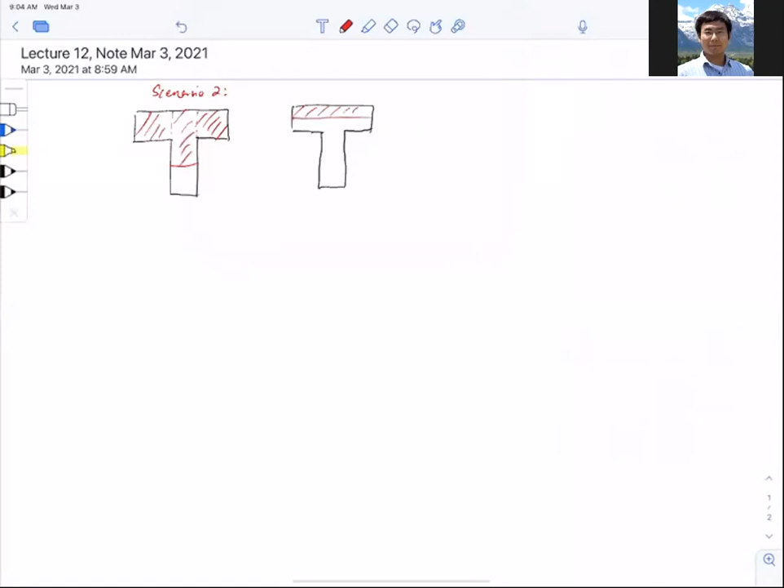All right, so for quiz 5, we already got a geometry, right? That is the T-beam geometry. And for the T-beam, we already talked about this. There are 2 scenarios. One is that we can treat it as the wing and the web, and this is called scenario 2. Now the other one, the reason I put it lighter is because I don't think you'll see this one, but even if you do, the compressive zone will be kept within the flange, and that's called scenario 1.

So if you look at quiz 5 particularly, it gave you the reinforcement area, which we calculated to be around 20 inches squared. And that's quite a bit. So I said in the quiz that you don't have to worry about how to fit the bars in for now. You can simply assume you just have a lump of steel right here, As, and let it be 20 inches squared. All right.

So that's what you do. You put a lump of steel there, and you can assume the height, right, by doing h equal to ds plus, now either you can do 3.5 or 2.5. At this point, it doesn't really matter to me, but I prefer you do 3.5, okay, because you have a lot of bars there, but that's okay still.

Once you get the depth, the first thing you do is to figure out which scenario. Now, we cut this number because we assume scenario 1. All right, so let's go with scenario 2 first. So if we go to scenario 2, the first thing is to separate the reinforcement. Okay, so we're back to how to calculate the moment capacity for T-beam, basically, right?

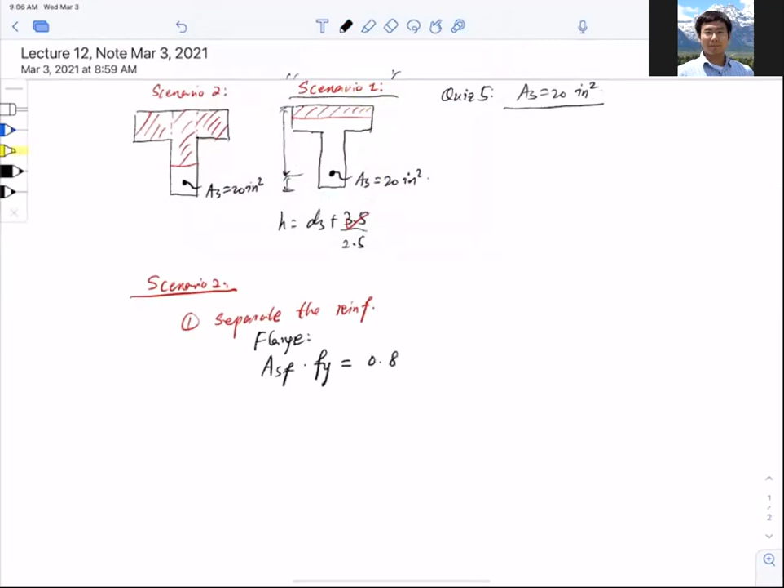So what you do is that we said assume it's scenario 2, right? So you have ASF, that is the reinforcement corresponding to the flange, and that times Fy, and you let it equal to the compressive part, which is 0.85 f prime c, and now the width is BF minus BW, to get you the wing or the flange width, okay, and then multiply by the flange height, which is HF. In this case, let's say HF because I already use H as my total height.

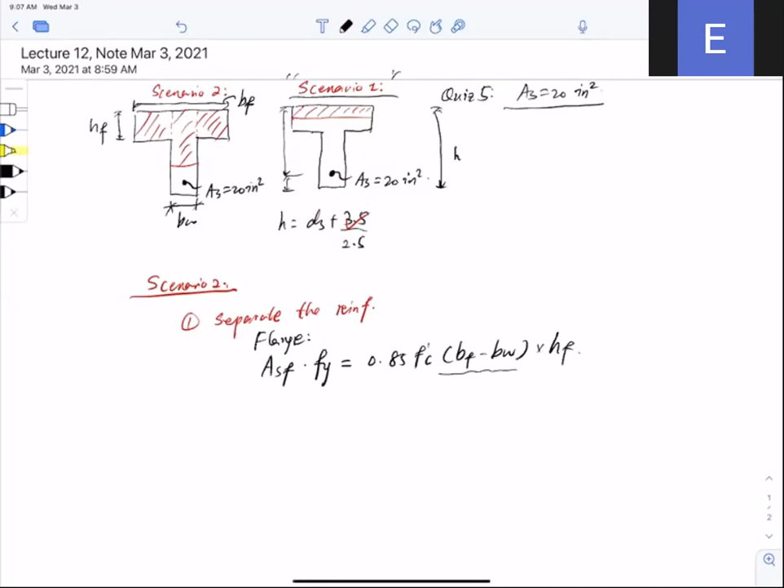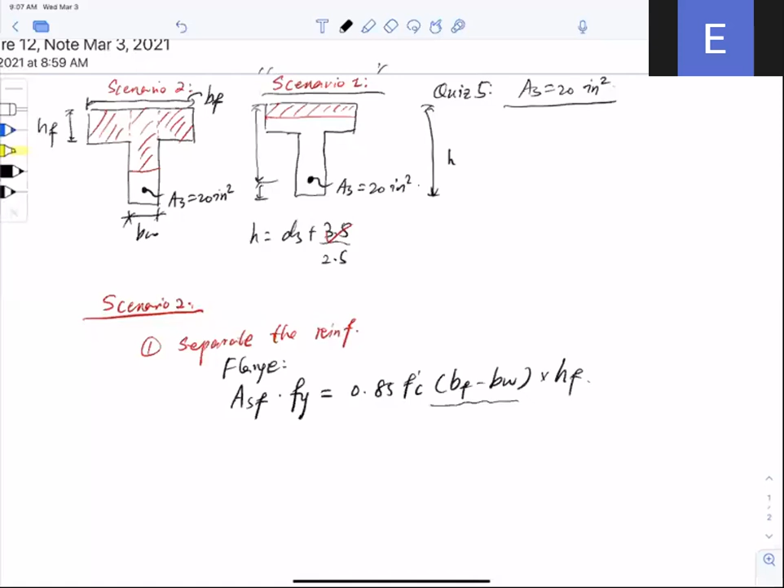Hey, Professor. Yes, ma'am. For your scenario 2 on the right-hand side, is that supposed to be scenario 1? Yeah, this is scenario 1, right? So that's like the compressive zone is within the flange. Okay. To me, it just looked like a 2. Oh, so sorry about that. How about that? Okay, yeah, that's scenario 1. 2 is on the left.

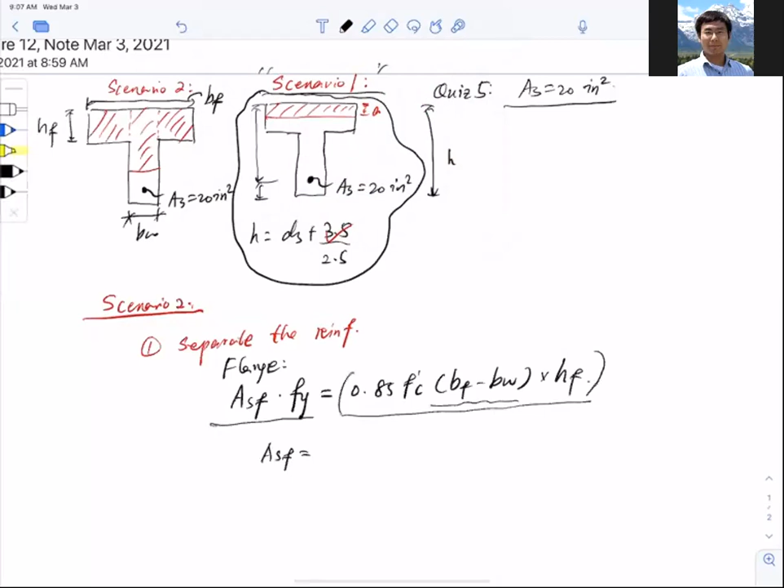All right, so let's get back to this. So this is how we define the reinforcement for flange, right? So we can immediately calculate the flange. So it's basically this bunch. I'm just gonna save time here because I have other things to talk about today, but this is how we determine the reinforcement for the flange, right?

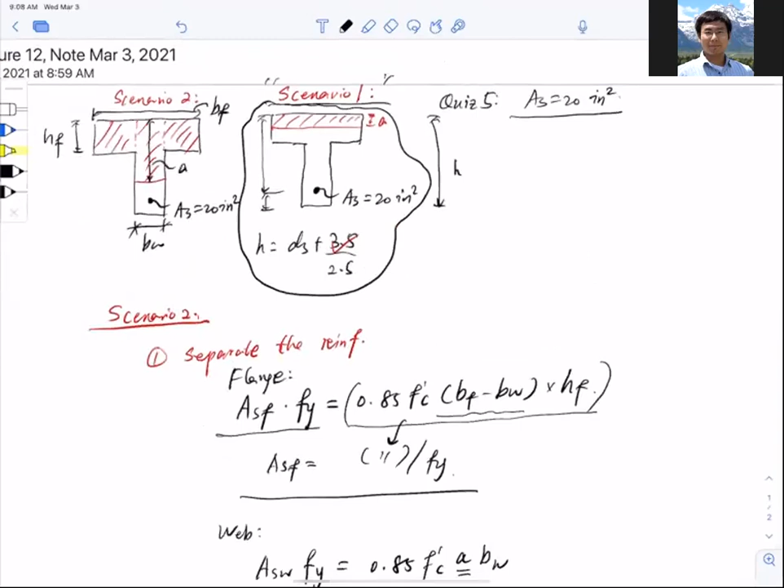Now, separately, we can define the web reinforcement. So this is ASW, and then you write the equation, and this is 0.85 f prime c. And now be careful, this is A times BW. And where is A? A is right here. Okay, so now with this, you could get ASW. But be careful, there's a problem. What is the problem? That is, you don't know A. But you do know ASW in this case.

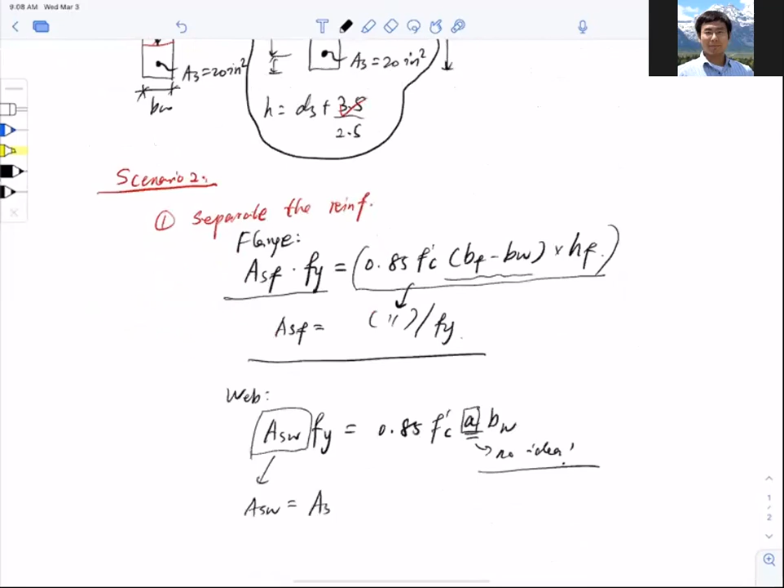What is ASW? That equals the provided steel AS minus the ASF. Okay, so in the web, now the story changes because now we can compute A, which is ASW Fy divided by 0.85 f prime c BW. So now you can think of it as more like a rectangular section, but the only difference is that this is called BW and this is ASW, right? And now you're getting the compressive zone A here, and essentially you can just compute the moment.

So now I have this flange and I have this. So I calculate the moment capacity separately, all right? So I can carry on like this, or I can probably shift this down here. So finish the top part first. For you, it probably doesn't make a difference, but for me, it's easier to see it.

So if you got this ASF already here, you know that for the flange, the tension equals ASF Fy, and the nominal moment resistance or nominal flexure strength contributed from the flange equals ASF Fy, and that is the tension side of it. So I want to do a little bit of drawing here, so be careful. Now you only have the flange that takes care of the compression.

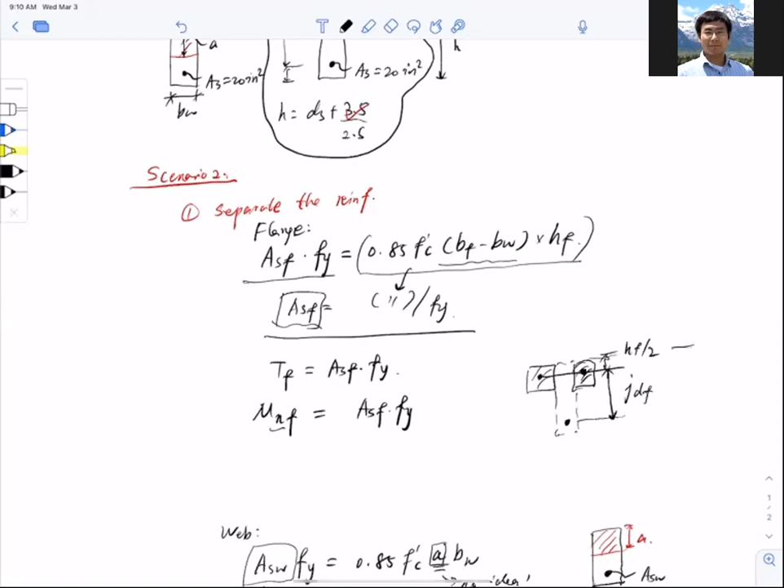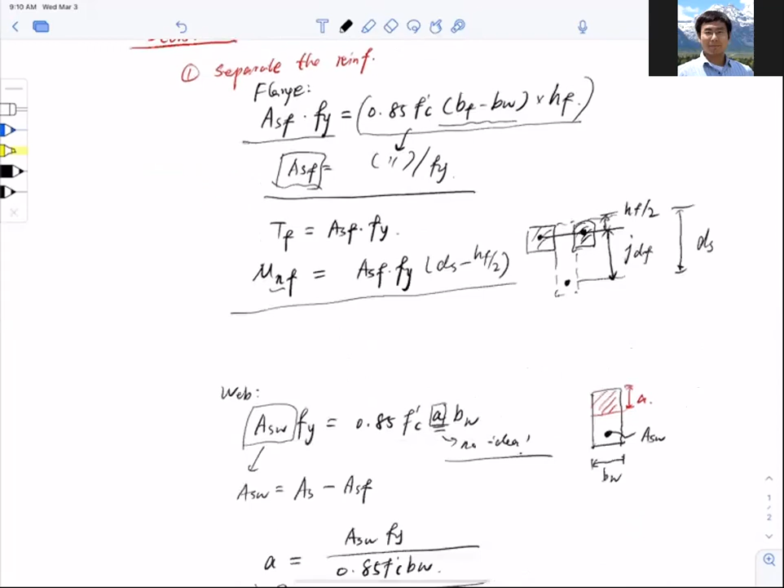So the distance, when you sum the moment, right? This part should be HF divided by 2, half of it. And that is where the compression center is at. So the distance between the compressive center to the depth, that is the lever arm for this one, for the flange. So now remember this is ds. Okay, so the distance should be ds minus HF divided by 2. So that's how you calculate the moment contribution by the flange.

So for the web, you already have A, right? So what you do is Mn for the web equal to As,w fy, which is the tension from the web, multiplied by the distance. And now this distance here from the drawing, this is ds, so ds minus the center of the compression force, and that is A divided by 2, so half A. Okay, so now that is the moment contributed by the web.

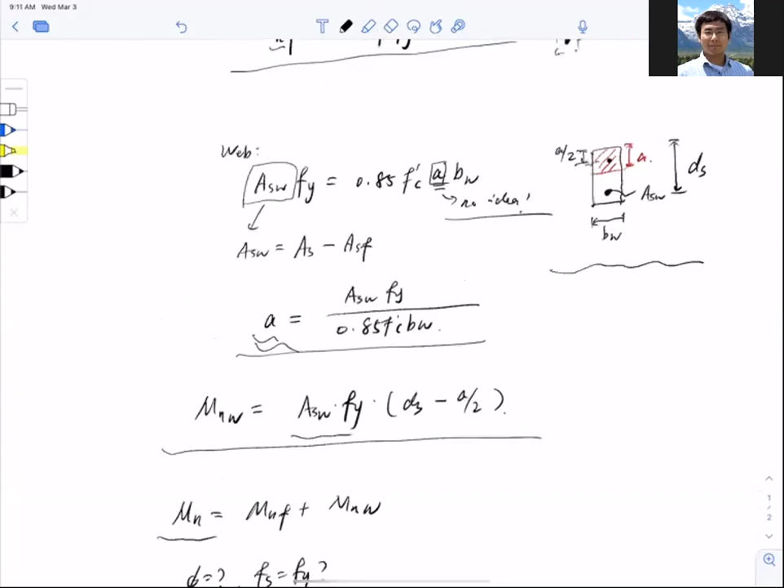So ideally at this point, you can do Mn equal to MnF plus MnW to find out the total moment resistance. But we might run into a problem: after you've done this, what about phi, the strength reduction factor? And even more importantly, whether the steel yielded or not. So these are the two questions we need to answer. So how to answer these two questions? We have to go back to the web, not the flange, but the web.

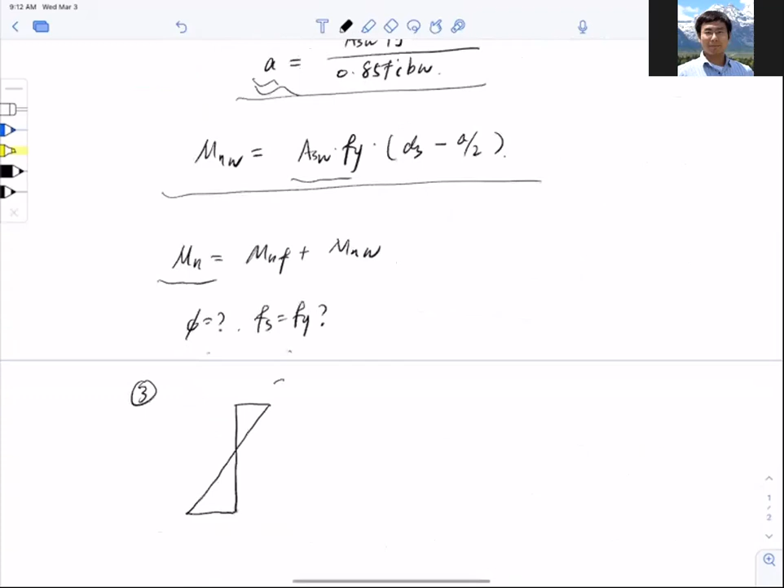So if I call this step 1, and this is step 2, step 3 would be, you take a look at the strain diagram. This is epsilon cu equal to 0.003. And here I have epsilon s, which I don't know, but I have the depth of it, so ds. Then again, you can make an assumption here for ds. Like I said, we use h minus 3.5 inches, which is fine. You can use 2.5, which is okay for the quiz. So this is the strain diagram.

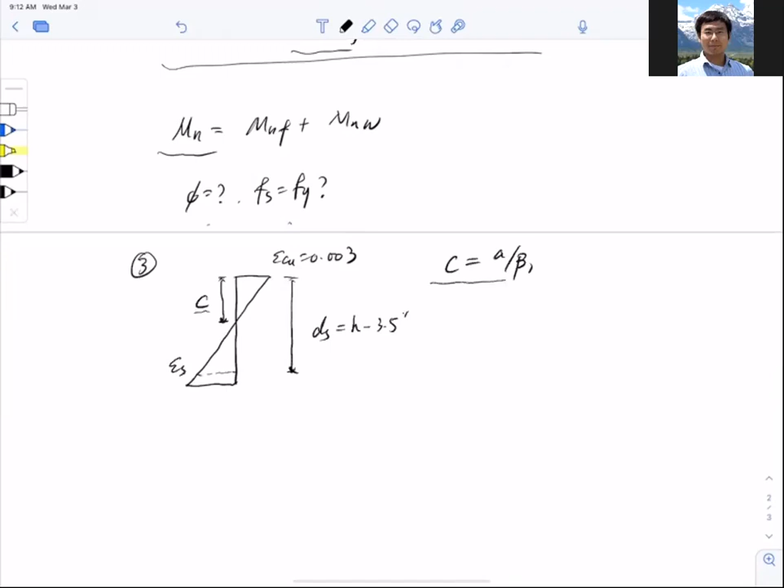So now we need to see the actual compressive zone. Although C is in the web, this equation C equal to A divided by beta 1 is still valid. So once you have C, I want to find the strain in the steel. So epsilon s equal to ds minus C divided by C multiplied by epsilon cu, and this is 0.003. Once you get epsilon s, you compare it to epsilon y, in this case for 60 ksi, 0.00207. So make sure it's yielded.

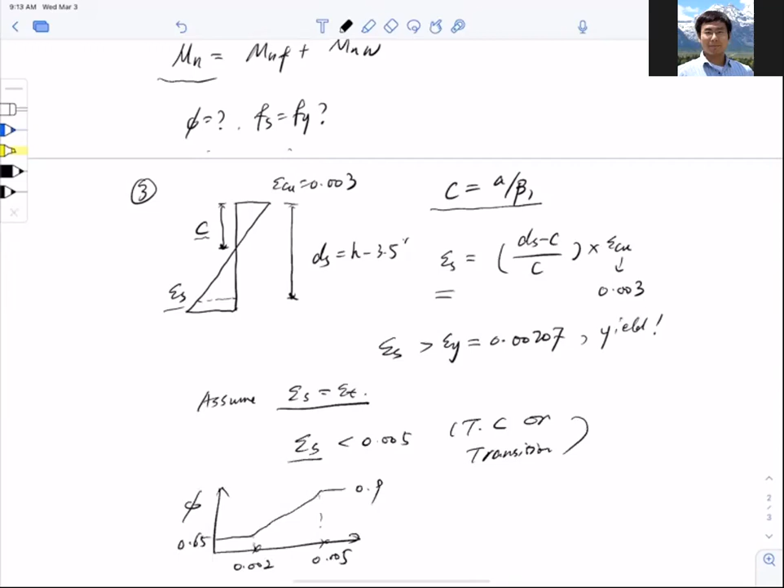And then you can make another assumption: since we don't know the exact bar configuration, assume epsilon s equal to epsilon t. And by doing that, you can also judge whether epsilon s is smaller than 0.005, tension controlled or transition, and use that equation for phi. Remember, this is phi, this is 0.002, 0.005, here is 0.65, 0.9, and in between linear interpolation. And then you can find phi, and now you can get phi Mn.

Okay, so I realize that this is basically an analysis based on what we talked about last lecture in design, but it's essentially the same thing. So at this point, in the process where you get A, you can do a quick check whether A is falling within the flange or not. If your A is not falling in the flange, that means the first estimation of reinforcement maybe is too much. We probably need to reduce that. But in our case, you should find that A is bigger than HF in this quiz.

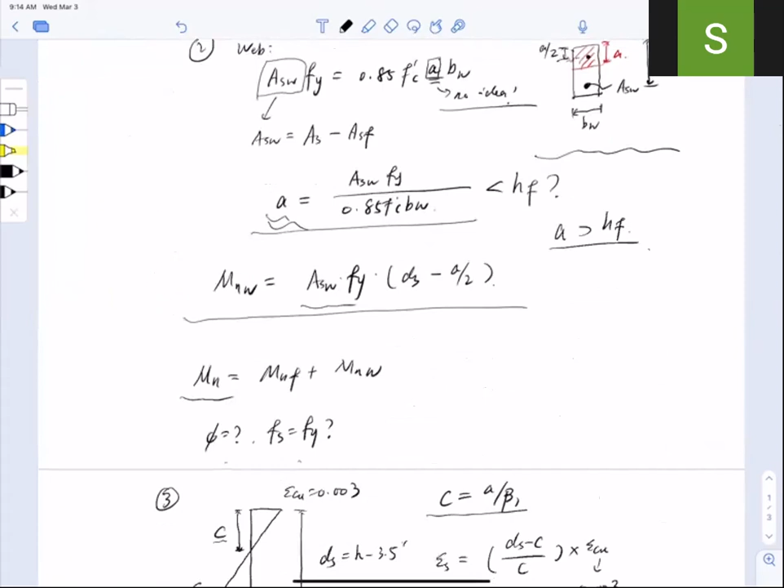What do you mean by that? So here you can see that when I don't know ds, I use H and I can estimate my ds. But if I say ds equal to 20 inches, you can just use this number. When I say you can adjust it, I see some students trying to fit 8 number 9 bars in the section, right?

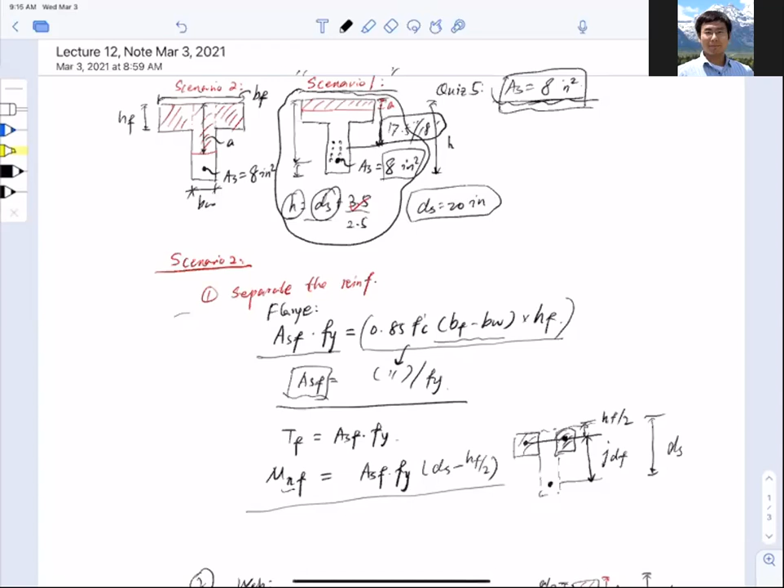And when they try to fit in, this is not 20 inches anymore, apparently, because it's a very narrow fit. So you may end up with 17.5, 18 inches. What I'm trying to say is you can go ahead with whatever number you come up with. I'm pretty sure you're still going to come to the conclusion that it's still scenario number 2, and you can follow the process to get the final moment capacity.

Oh, okay. Thank you. Yeah, no problem.

I just want you guys to continue with whatever height you determine at first, because the shorter height you end up with, you just have to stretch your steel further. You have a smaller compressive zone, right? So you have larger strain in the steel to make sure you yield it. That's the only difference. Okay. All right. Any other question for quiz 5?

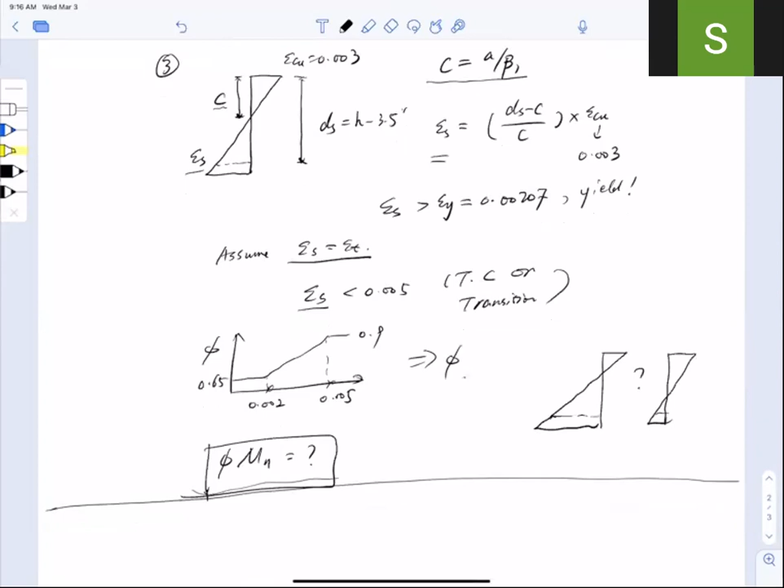Let me see if I can pick up this question from chat. Can we just treat it as a big chunk of steel instead of fitting the 8 bars, or do we have to fit the 8 bars? Either way is fine. The aim of this quiz is I want you to run a forward analysis. Design is more like a reverse way, right? You don't know, and you make a guess at the reinforcement. But I want you to exercise a forward analysis, basically given the reinforcement, find the moment capacity. So the bar detailing is not the concern for this quiz. Okay, thank you. Yeah, not a problem.

In the book, we are currently in shear, so that's supposed to be chapter 6, and I can double check on that. And we are talking here about the T-beam. This is still flexure, okay? And for flexure, you should find it in chapter 4 in the textbook. All right, any other questions about this quiz? Any other question about this T-beam?

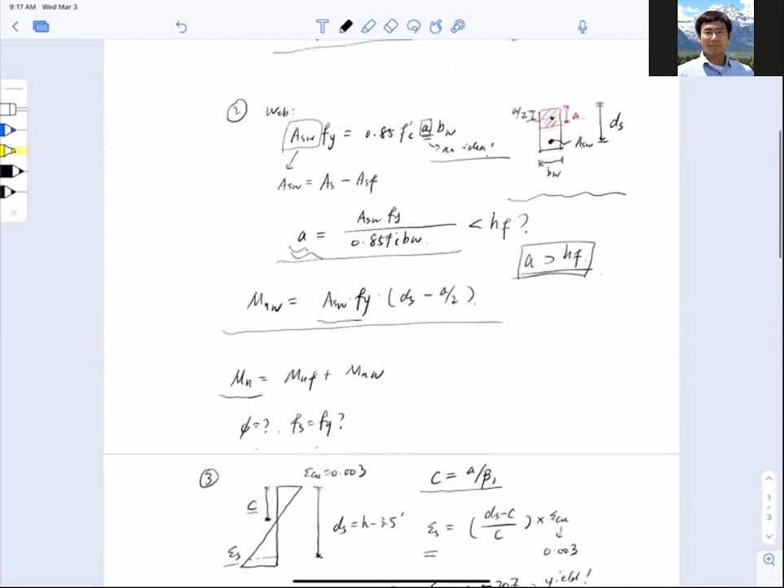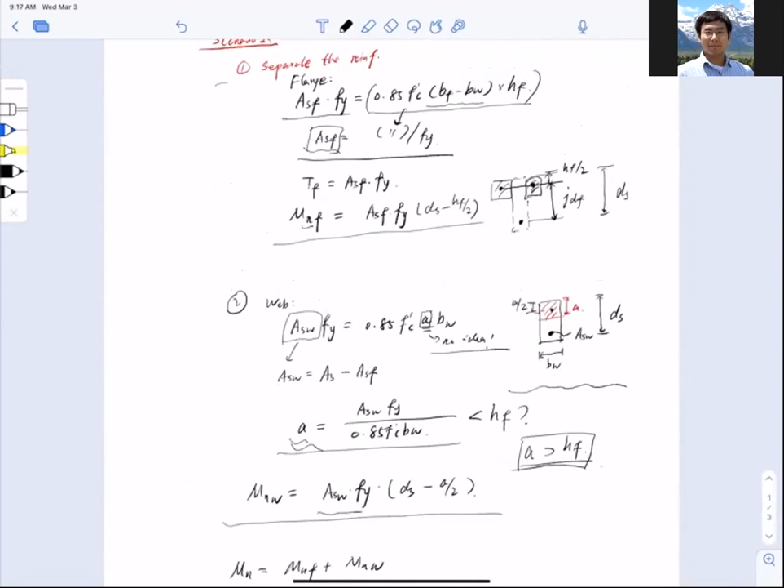All right, let me say this. In the exam, we're not going to test you on T-beam design. If we were to test you, we're probably just going to test you on the analysis. For the analysis part, there's also the irregular section, like sections with an opening. These are both in chapter 4, I believe. So between the T-beam and the irregular section, we pick one for a full workout problem.

In problem 1, it's going to be multiple choice and fill in the blank. There, we'll only test you on T-beam analysis. It's going to be basic stuff, basically asking you to check if it's scenario 1 or scenario 2, whether the compressive zone is within the flange or not, that kind of quick thing. So I'm more worried about the irregular section for exam number 2. All right. Any other question on this?

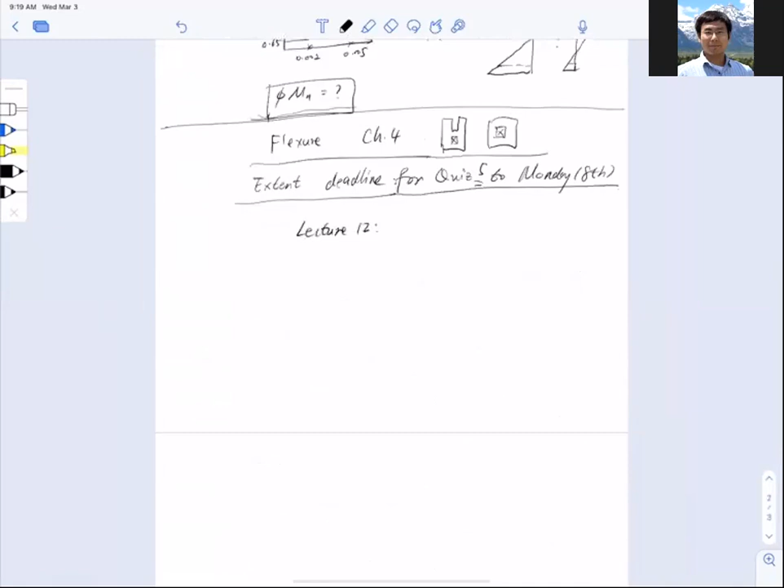So this is the last piece of the T-beam. I just wanted to clarify that, but let's quickly dive into lecture 12. We're going to continue to talk about design for shear, all right?

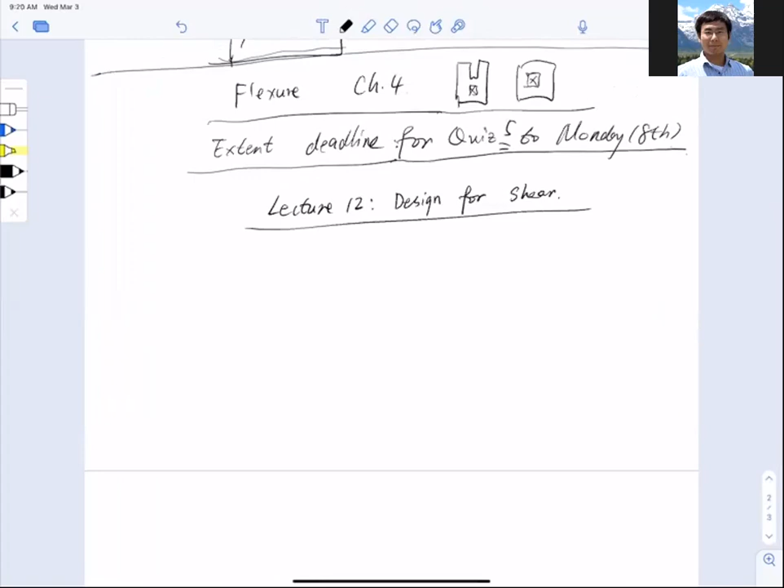So let's quickly get back to design for shear. Today our objective is to understand the shear mechanism, so the shear transfer mechanism.

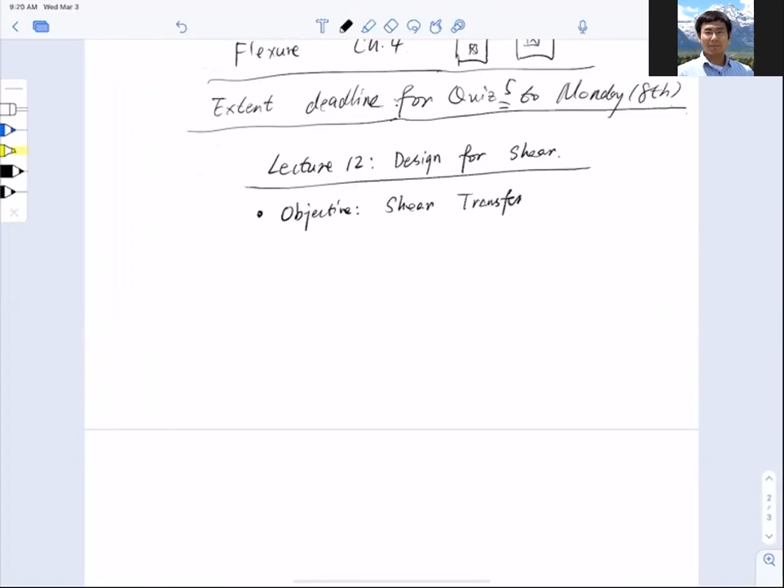Okay, shear transfer mechanism. So what is shear transfer, right? That means the shear force being transferred from one segment of the beam to the other segment of the beam. Now if you remember, last time we showed the stress distribution of an elastic uncracked beam, and we showed you that essentially the crack is going to run in a diagonal direction like this, and just crack through the beam like that.

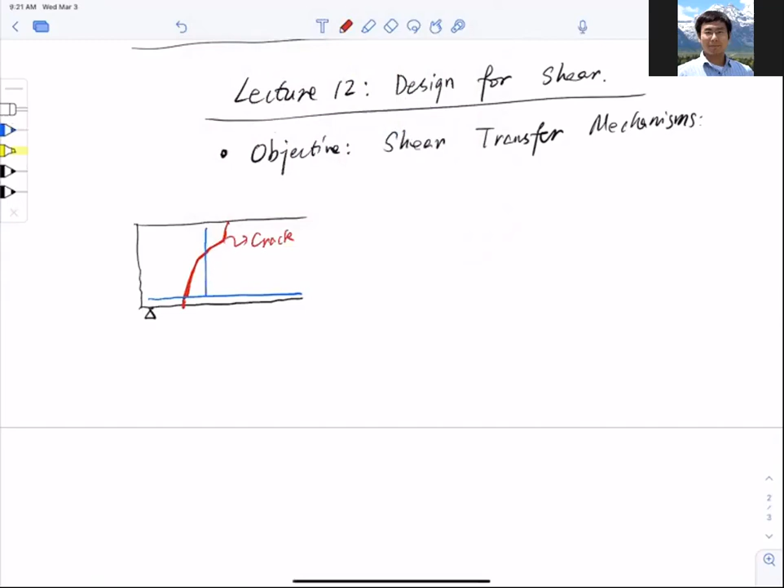And we also provided the reinforcement, right? Say this blue color, so transverse reinforcement goes here, and longitudinal reinforcement goes here to provide resistance for the cracked section. So when I look at this red crack, I want to take a look at the free body diagram, or how the force was transferred from one segment to the other segment. And this is what I see.

So I have the end of the beam, and I have support. And remember, I have two-way support here on the left. And now I have a vertical small section here, and that is the residue due to the cracking. And now I have the crack that goes more like 45 degrees, but not exactly, more like a curve, and then ends up like that. So that's what the crack looks like.

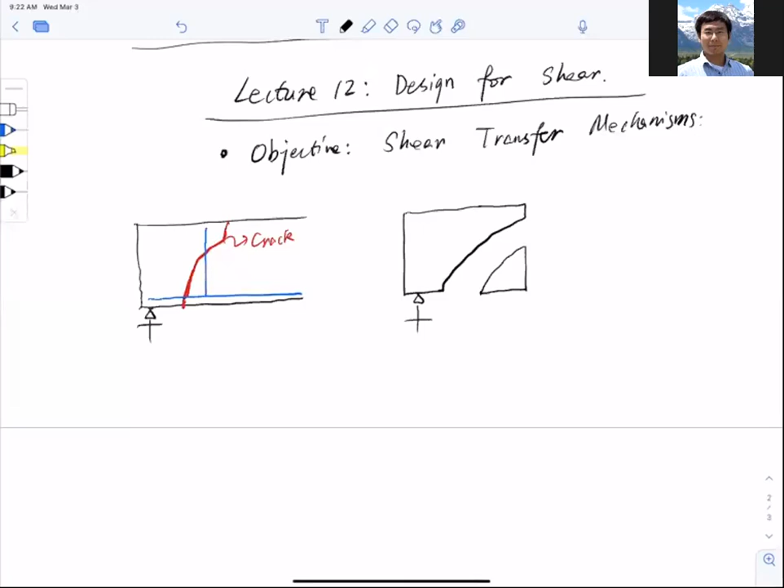So naturally, let me split this part away and expose the right-hand side of the piece of concrete. Let me just zoom in here and examine the forces exposed by doing this cut. First of all, I expose this vertical section, and let's call it compression C1, the remaining compression from the top part. And then I will have a shear force, and I call it VCZ.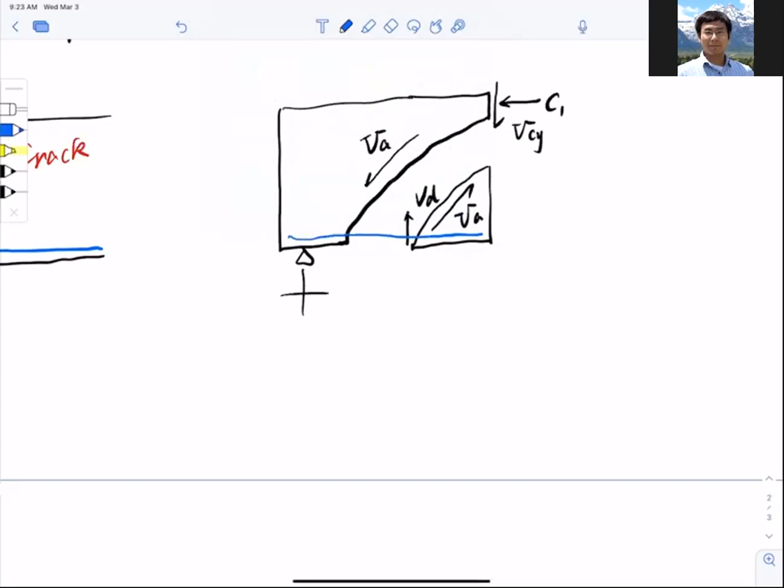Now on the diagonal crack, I have the shear force, I call it VA, and the corresponding counterpart, also VA, on the bottom part to balance it. And then I have shear force VD, caused by the dowel effect, that means by the longitudinal bars. Think of it, the bars push the concrete to resist the concrete being sheared apart. So the shear on the transverse section of the bars provides VD, the dowel shear force.

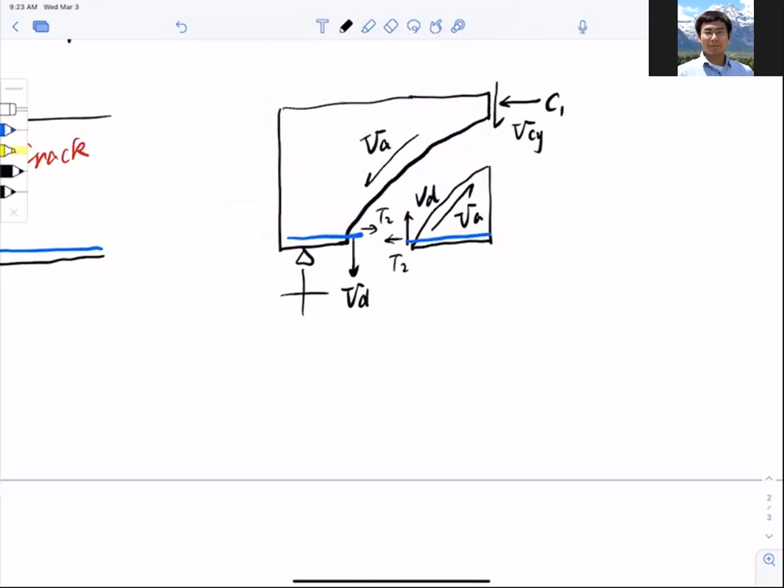And since it's balanced, I have VD on the left-hand side as well, and then I have tension. Sorry about that, I should actually cut it, because it's being cut here. I should have tension as well, and this tension is called T2. And of course, on the left-hand side, same magnitude but opposite direction. So these are all the forces you see on the section near the crack.

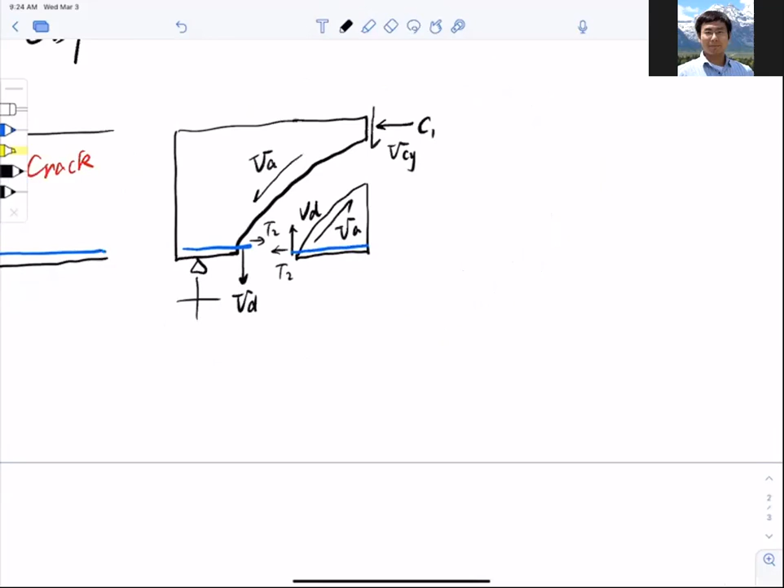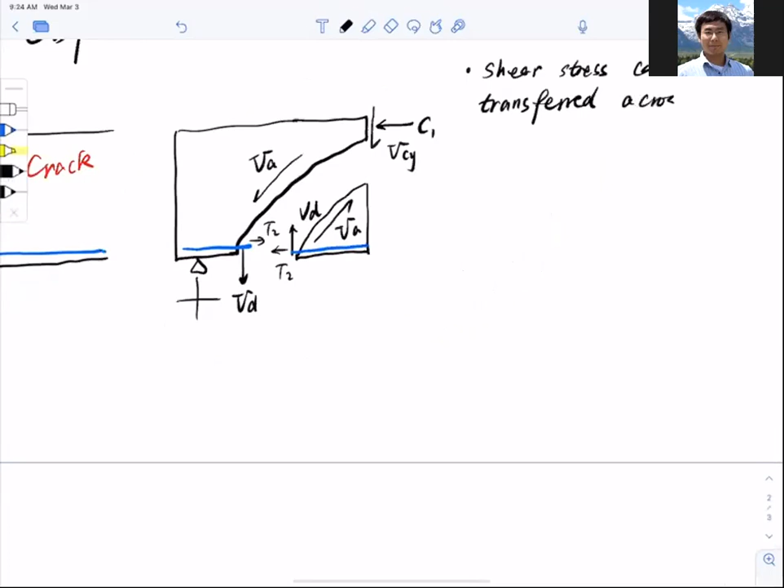Let me just push this a little bit over and explain. So from these forces on the crack, we can say that the shear stress can be transferred across the diagonal crack through three main contributions. So the compression is definitely not it.

So the shear force, right? Only pick up the shear: VCY, that is shear on the top remaining compressive zone, VD, which is shear from the bottom longitudinal bar, and VA, which is shear at the diagonal crack location. So these are the three major shear contributions we see.

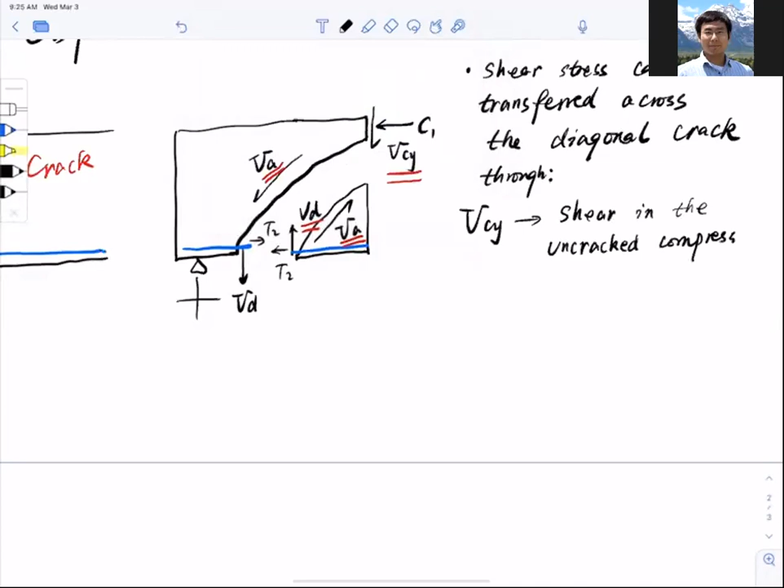So we see VCY, and that is shear in the uncracked compressive zone. So that's the first contribution. Second shear contribution, and this will show up in the exam, so pay attention: VA, that is the shear on the diagonal crack.

And we give it a name: interface shear transfer. And notice that I have an A here. What does A stand for? It basically stands for aggregate interlock. Now you may say, Bob, what is aggregate interlock?

I cannot see it. So let me put a magnifying glass here on the interface just to show you what it looks like. I will have a zoomed-in picture of the crack. So it's definitely not flat anymore. It's more like a zigzag.

It's more like a zigzag, right? And if you pay attention to it, these zigzags are basically aggregates, rocks, coarse aggregates inside the concrete, right? So these aggregates will rub against, use a different color here, rub against the aggregates from the bottom diagonal crack side, and give you that shear resistance or shear transfer, like we labeled VA. Okay, so this is what is meant by aggregate interlocking.

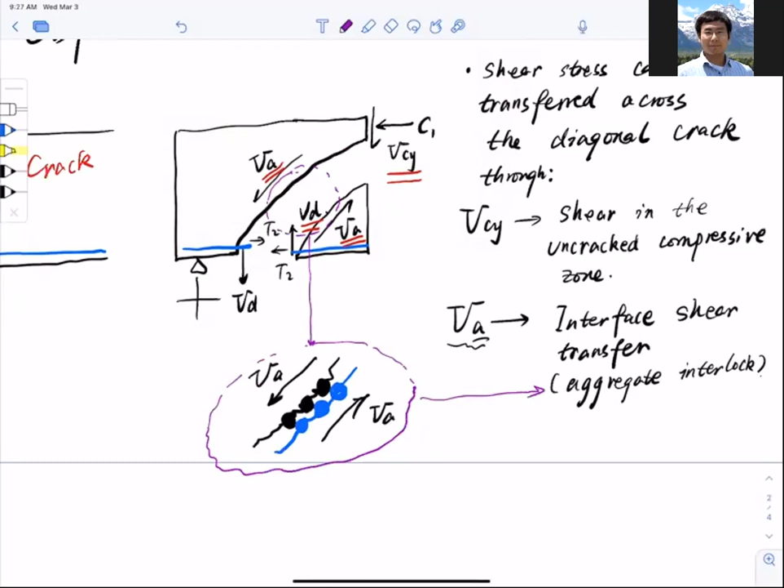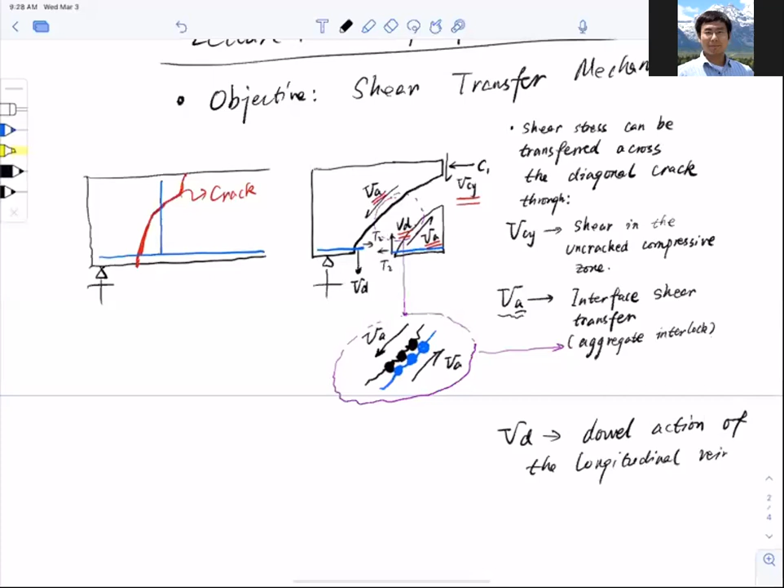Okay, so this is aggregate. Well, I already put it here, so let me just link it to this one. Aggregate interlock. Okay, so that's the contribution by the diagonal crack. And then last but not least, the third contribution. I realize I skipped a page, but make sure in your notes the three are together. So VD is called dowel action. Dowel action of the longitudinal reinforcement. Okay, that's the dowel action.

So with these three, now I can say my total shear, and this is shear contributed by concrete alone. Total shear contribution from the concrete only. That consists of VA, which is aggregate interlock, plus VCY, which is the compressive zone shear resistance, and then VD, which is the dowel action from the longitudinal reinforcement. So these are the total shear resistance from the concrete that you can get.

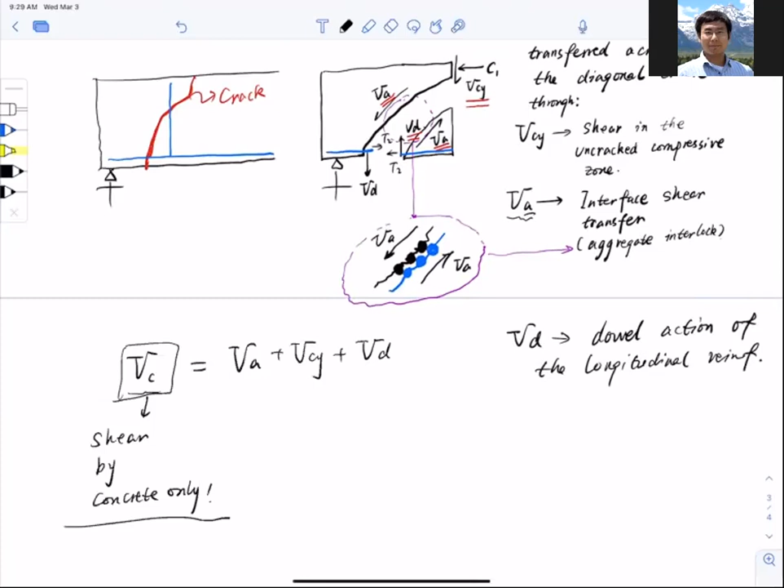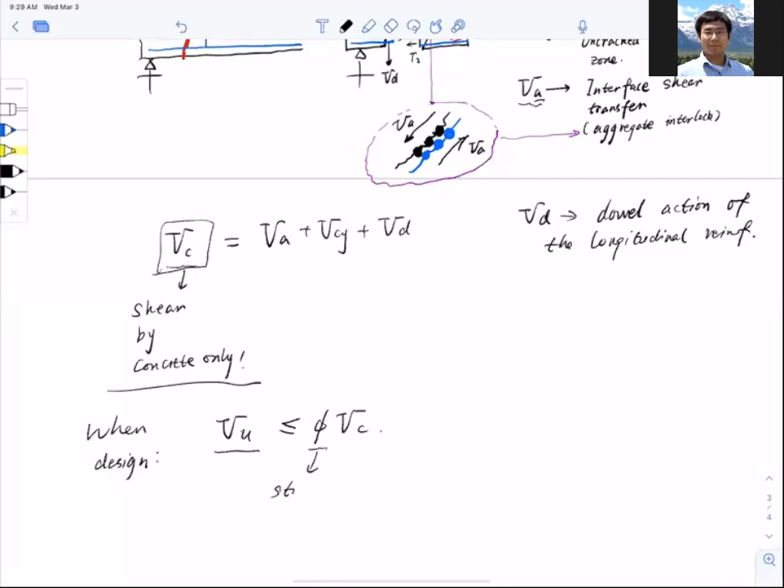Okay, now this is all fine, right? When we design, we want to make sure that VU has to be smaller than or equal to phi VC. Again, this is the strength reduction factor. You've seen this. And for our case, for shear, and this is very, very important, don't get it wrong, this number equals 0.75 by default. Remember from the ACI 318 code, by default, 0.75. And VC, of course, is the concrete contribution.

So when this happens, we feel safe, we're okay. I wouldn't write down okay because we still have to put steel in it, but that's not an issue right now. So this is what we wanted to see. But what if the concrete contribution is not sufficient? What if the concrete alone cannot take it? In this case, web reinforcement, or transverse reinforcement, or stirrups, several names, is needed. You need steel, basically.

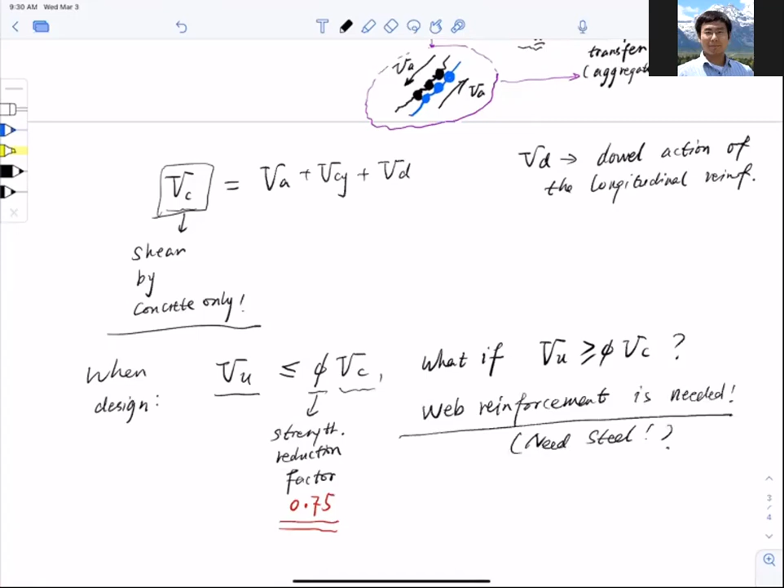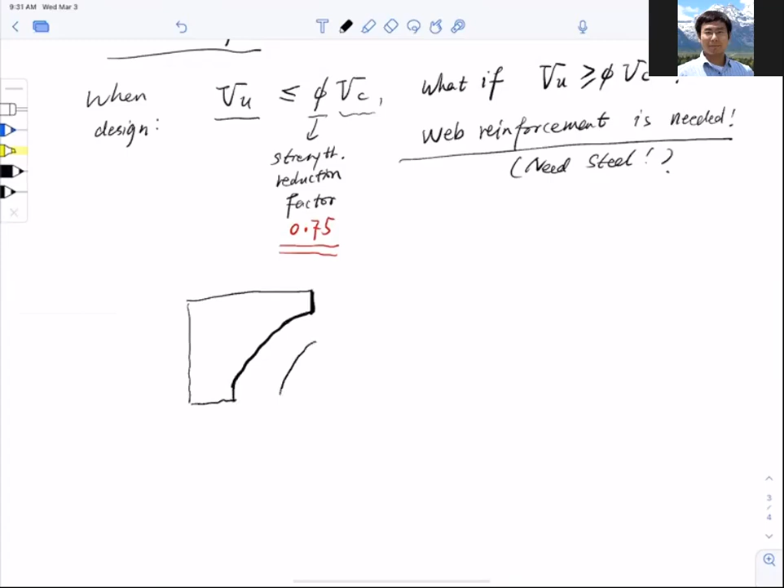All right, so you need steel. So how do we put the steel in? Again, we have to go back to the drawing here. So let me show you. This is the crack, again with this nice curve. You notice that when I draw the crack, there's the uncracked compressive zone, the arc-like diagonal crack, and the remaining portion of the crack, which is straight again, to put your bars in. Just some minor details. And then I have this piece right here to worry about, as we showed you already.

Now I have VCy, compression C1, VA, VA, VD, and VD here. And again, we have tension T1 and tension T2. So that was exposed. To resist the shear, you can erase them or leave them there, but let me just do this to show better. I'm going to remove the tension and compression from it. Essentially just VCy, VA, and VD to care about.

So if I want to resist the shear, what I'm going to do is build cages. On top of the longitudinal reinforcement I always have to have in a beam for flexure, I need to provide stirrups, and hang the stirrups on it. So as you can see, for regular stirrup cages on the construction site, these are stirrups. I'm trying to draw a 3D view for you. Of course, they're not hard cornered.

They're more like a round cornered, okay? So even better, let me just draw it completely like what we did before. So we have this kind of like a bent, and I have another bent like so. And they are, this should be parallel, okay? And then I run my longitudinal reinforcement like so, okay? So I have another stirrup sticking up like that, curve like this, and another stirrup sticking out like that, curve like this, curve like this.

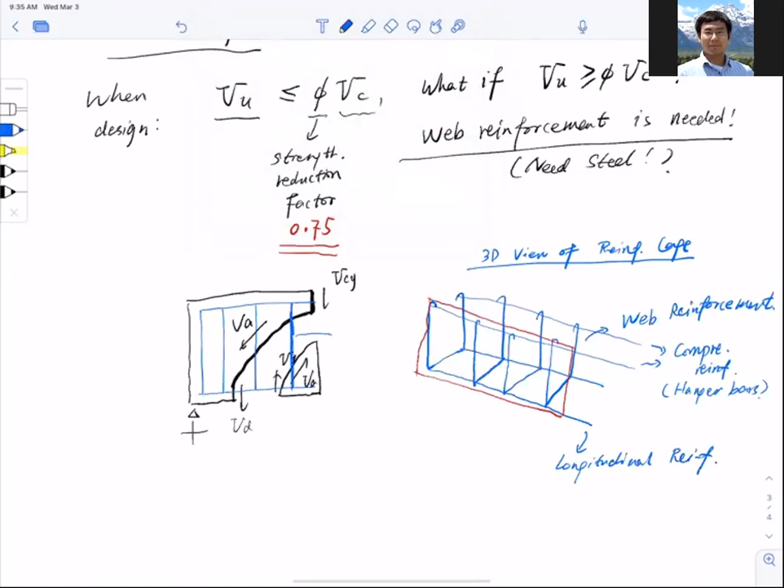Okay, so essentially we're looking at the side view, right? Side view. That means we're looking at the side like this. Okay, but be careful. Each leg you see in here, right? Each blue line you see in here, right? This essentially is cutting across. Well, let me clear up the number. So this is 1, 2, 3, 4, 1, 2, 3, 4. So it must be this one. So this fellow here that we exposed, right? It has to cut through one leg, two legs. All right. So from the side view, these stirrups provide additional shear resistance through the cross section of these two legs here.

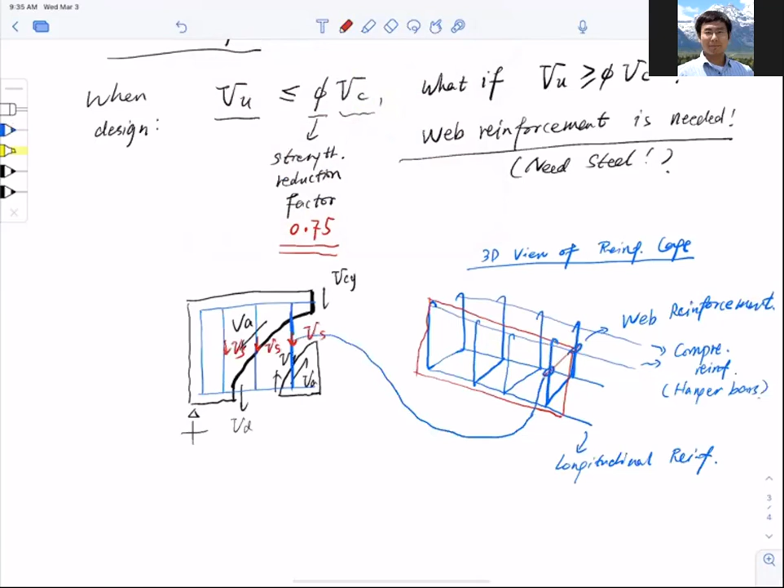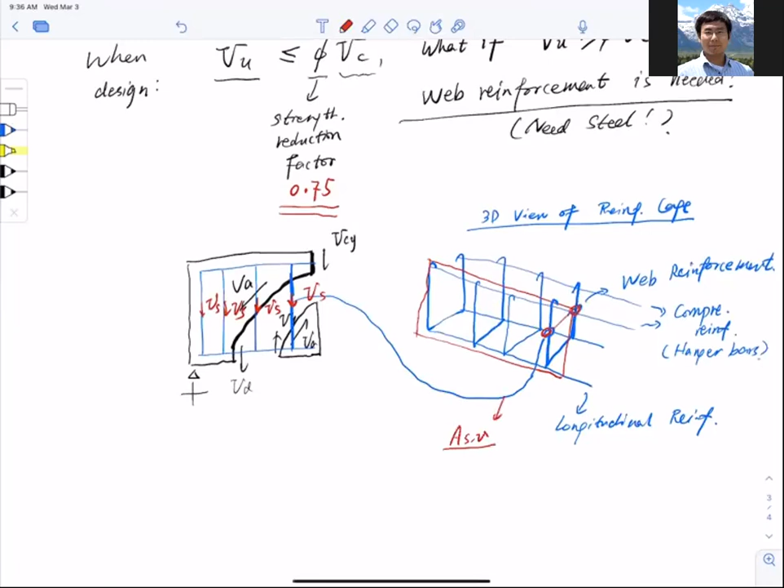So now this is the reinforcement provided shear resistance, Vs, and together Vs, Vs, Vs. Okay, and that is the steel. All right, so just got to be careful, right? If I call this Vs, the corresponding cross-section area for shear, I call this Asv to differentiate from As as a flexure. All right, now there's some details we need to clarify. Now for Asv, it really depends on number of legs in the stirrups.

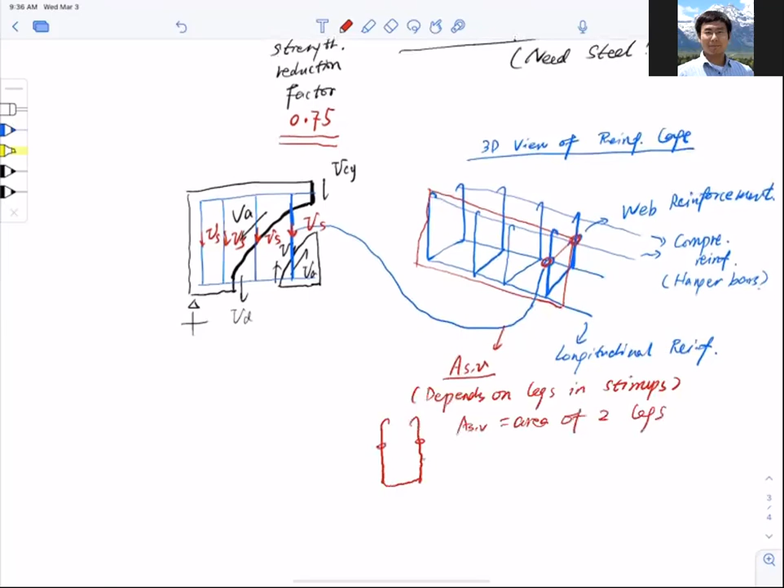Okay, how so? For example, if I have this stirrup, I have one cut and two cut. So Asv is the area of two legs. This is one leg, this is two leg, right? If I have this kind of reinforcement, okay, and actually I should draw it like this, but that's fine. So I have two stirrups overlapped, right? Now I have 1, 2, 3, 4. So now Asv equal to area of 4 legs. Okay, there are some subtle details. So be careful what kind of area you have here.

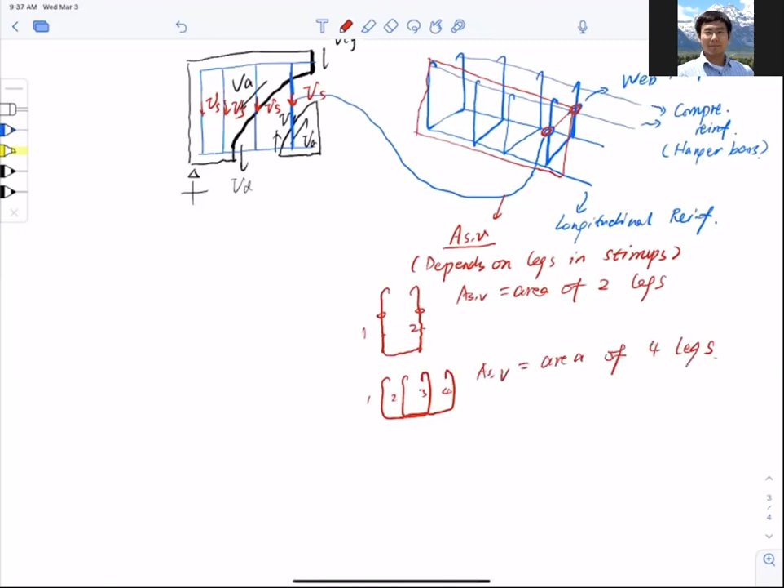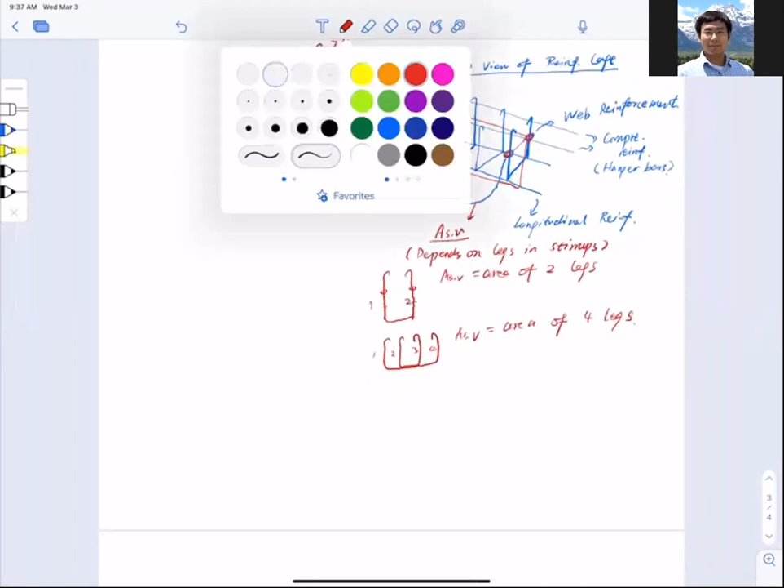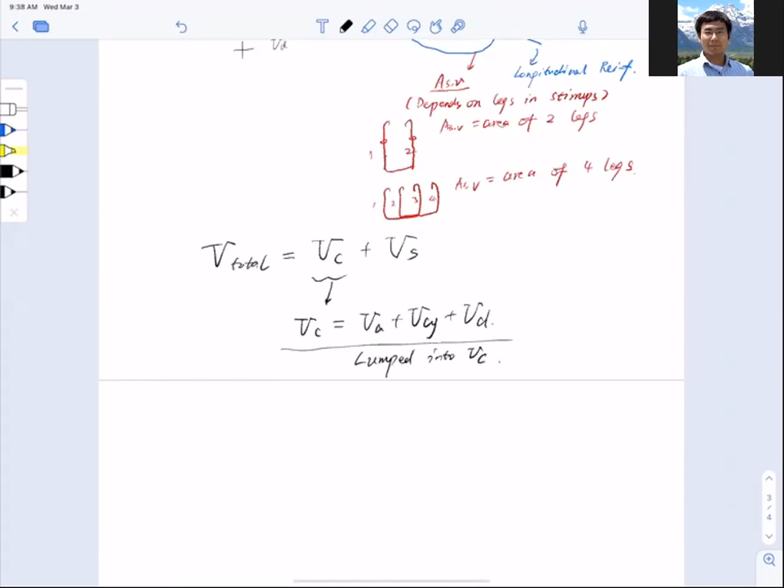All right, so that is the steel or web reinforcement inside the beam in the cage, right, to resist the additional shear. So with this, we'll say that the total shear contribution should equal to the contribution of concrete plus the contribution of steel. And we know that the contribution of concrete to resist shear comes from three parts: the aggregate interlocking, compressive zone shear, and the dowel action. But don't really worry about it because it's all lumped into Vc. All right, so now that is the concept for the shear reinforcement.

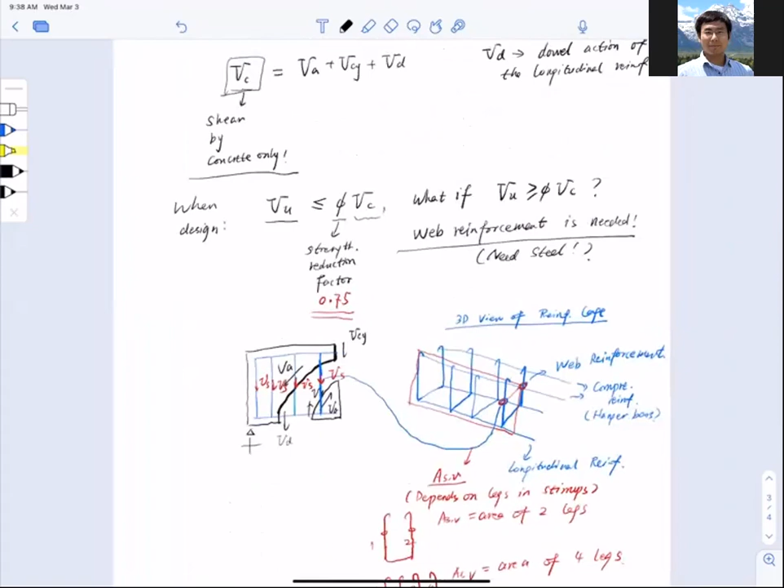Okay, so I just want to quickly pause here. Any questions on these conceptual drawings and illustrations? Anything? Can you scroll back down to the bottom? Yep. Can you see it better?

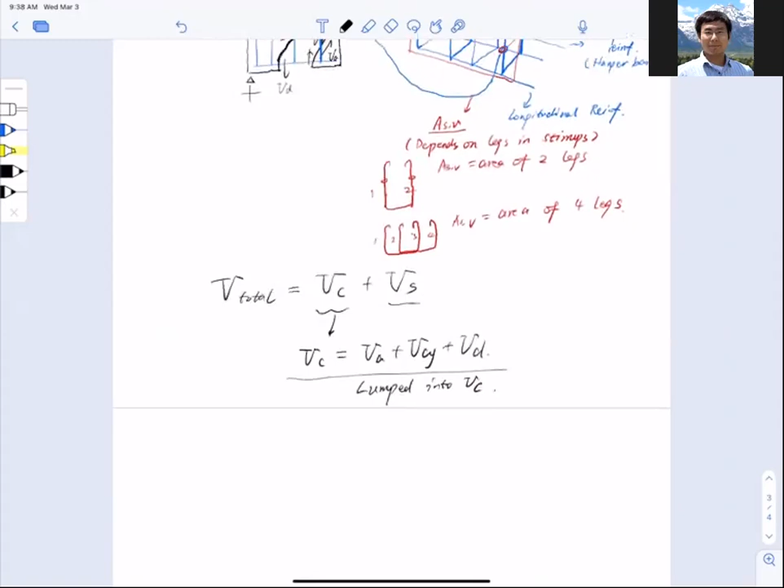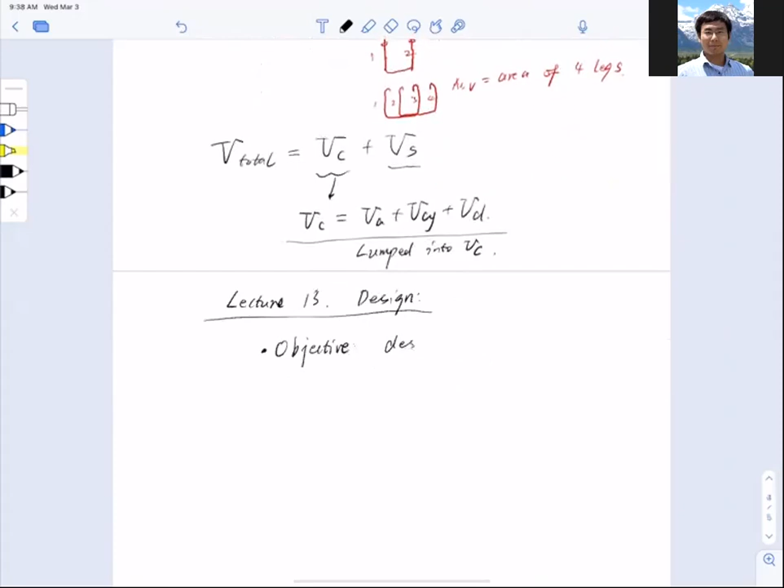Okay. All right, so that is the drawings or the concept for shear, right? So now the game becomes easy. Why I'm saying that? Because now I can split my resistance between concrete and steel and design for it. Okay, so I'm just gonna open up lecture 13 and we'll continue that tomorrow, but let me just start it. So lecture 13, design. From the mechanism to design. So the objective: we need to learn the design equation for shear.

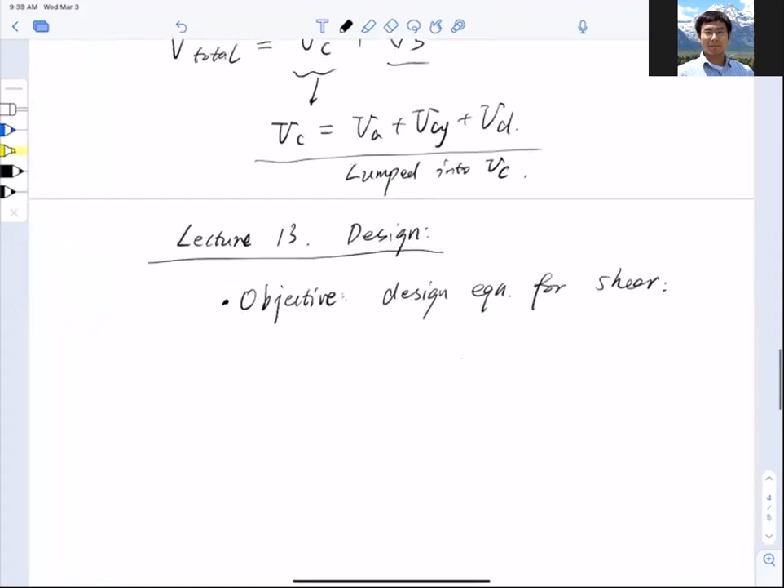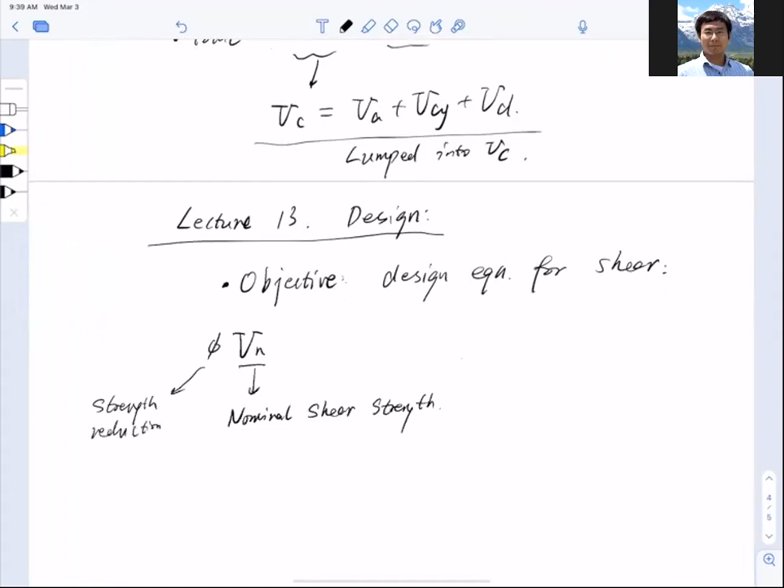Okay, so what is the design equation for shear? First of all, let's take a look. Phi Vn, that is the strength reduction factor multiplied by the nominal shear resistance. So let me name it: this is nominal shear strength. And this is the strength reduction factor as you know it, and this strength reduction factor is equal to 0.75. So let me write down here: phi equal to 0.75.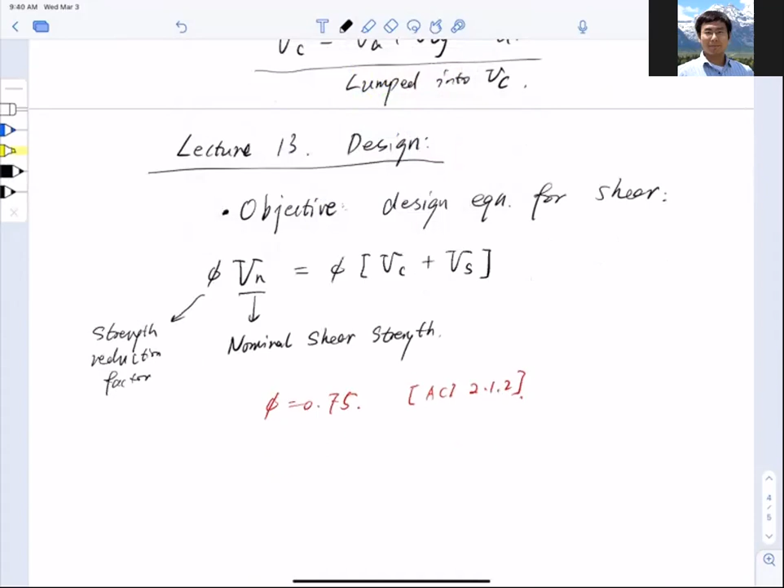And this is based on ACI 21.2.1. Okay, so this is better than flexure. We don't have to compute it; it just gives you that it's 0.75. All right. Now with this, I say that phi Vn, which is the total shear resistance, can be divided into two parts. So that equals phi times, in brackets, Vc, the concrete part, and Vs, the steel part. Phi, Vc and Vs, two parts.

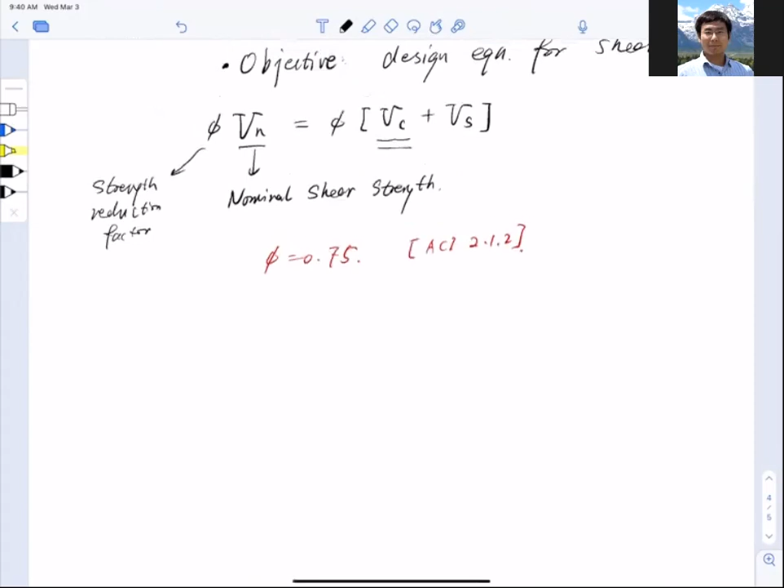So usually what we do is we determine Vc first, the concrete resistance first, and then we find out how much reinforcement we put in. All right, how much reinforcement we put in. And if you want to correlate to your code, this is in ACI 22.5.1.1.

Okay, so the essence of the design is to find out how much shear resistance is needed from steel, and that equals phi Vn minus phi Vc, divided by phi. So phi gets canceled essentially. And now Vn equals Vu divided by phi, because don't forget Vu is the applied shear, and that has to be smaller than or equal to phi Vn. So Vs equals Vu divided by phi minus Vc. All right, so that is the design approach.

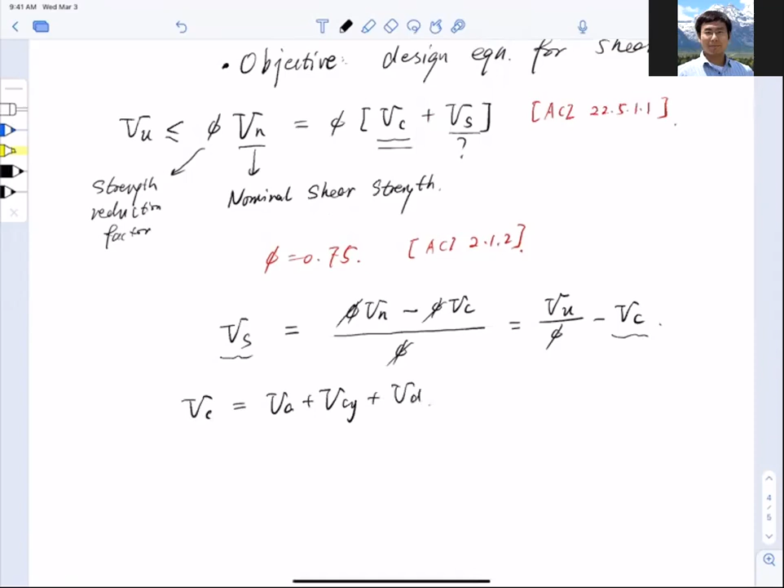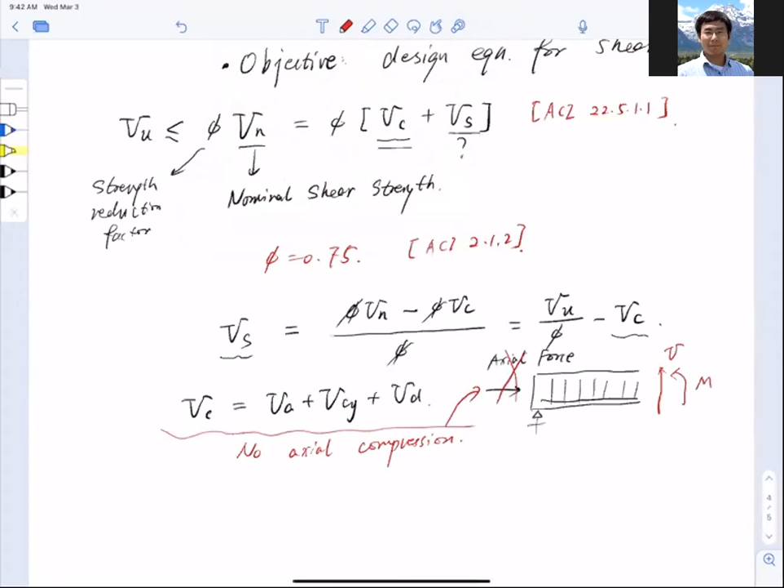So how do we figure out how much contribution we have from the concrete on the section? We go back to the equation Vc equals Va, Vcy, plus Vd, dowel action. And it turns out that under no axial compression... So you may get confused, what is axial compression, Bob? If you remember, when we talk about a beam, it was supported at the ends, and we have flexure, now we have shear. That means no axial forces. We always neglect the axial forces. We only care about the bending moment M and the shear forces in the section. So that's the definition of no axial compression.

So when there's no axial compression, this equation holds, and for the contribution from concrete Vc, I'm using the 14 code definition, and I'll explain why tomorrow. But for now, the concrete contribution equals 2 lambda square root f'c bw d. And you can find this from ACI 22.5.5.1.

Okay, and let's take a look at this equation here. Lambda is a weight factor. So for normal weight concrete, lambda equals 1. For lightweight, lambda equals 0.75. It's just a weight factor. Now f'c, we all know that is the compressive strength of concrete.

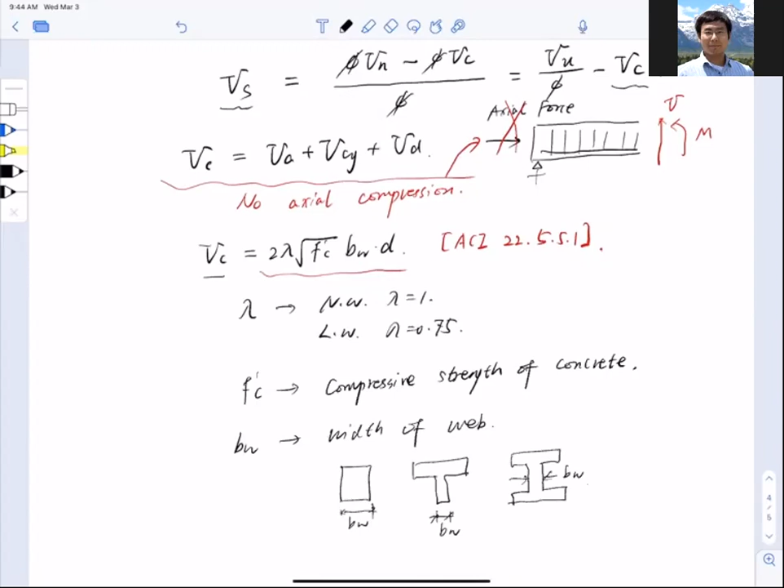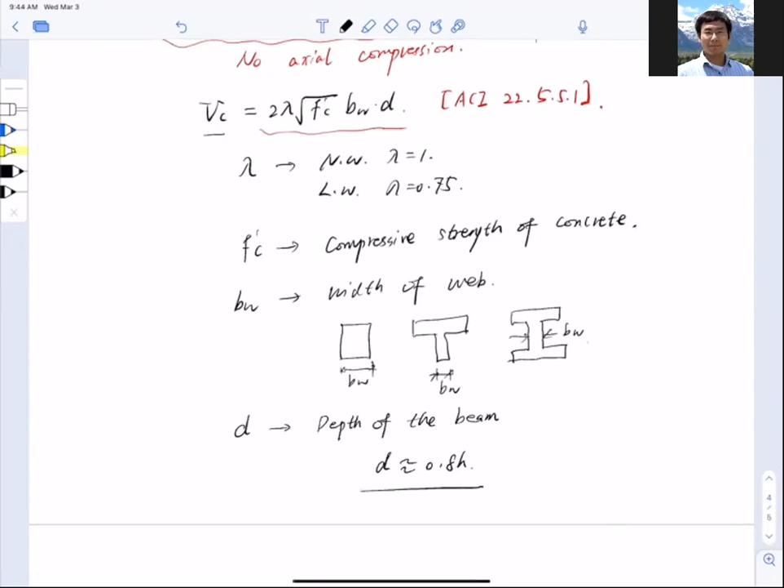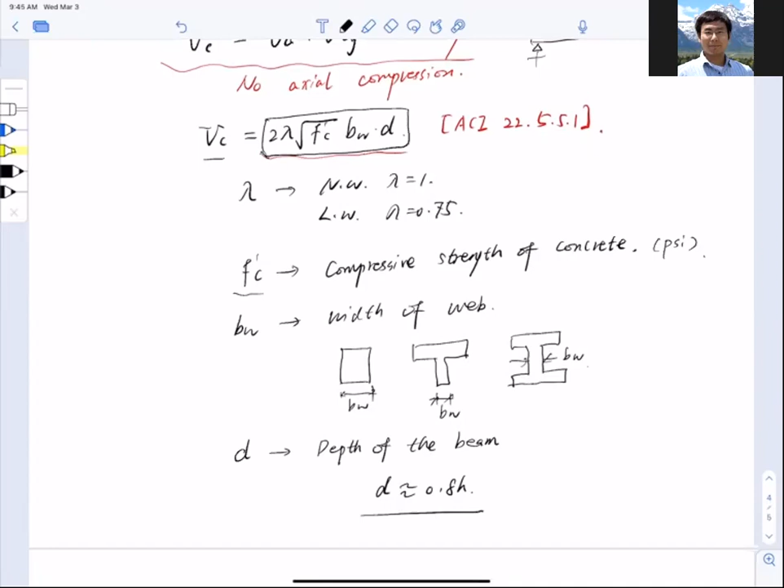So you may ask, Bob, where do we get this equation from? Is it from an analytical approach? Do we use a mathematical model to come up with this equation? The quick answer is no. We basically got it from empirical fitting of experiments. We've done a lot of experiments, and this equation is really empirical. Another question: you have f'c here under the square root sign, so what unit do we use? We use units of psi. Okay, so this is the contribution by concrete. Now, how about steel? We will talk about it tomorrow in the Thursday lecture.